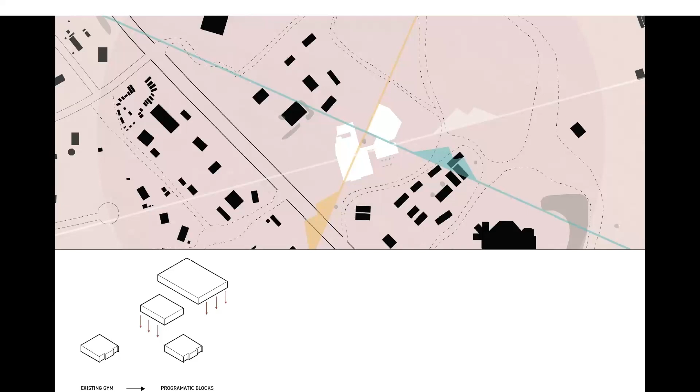Looking at the site and also the form that we want to look at is the existing gym. From the existing gym, we get our programmatic blocks and the areas needed for each of these programs. The Navajo culture seeks guidance from sacred mountains, so in plan we thought to seek guidance from them to work out our axes and where our directional events are happening.

From here, we want to recess, emulate, and imitate the existing form. The current gym has a slanted wall that goes up, and we wanted to look at that form as a precedent for how we got our form.

From here, we look to capture the elements: air, light, and water. When looking at water, water is the strongest element. It can put out fires, wind can't really control it, and it can move earth. Why let us try and control water in our project?

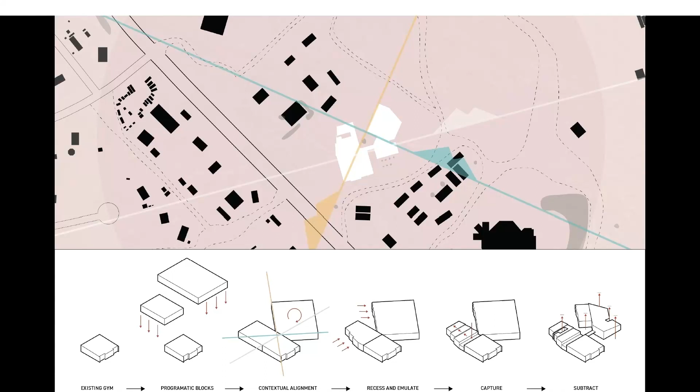Instead, we would like to have that same notion of Tó Naneesdizí as in Tuba City, land of tangled water, having the water journey through our project. When water comes to our project, it flows like a lifeline. It revives the surrounding landscape, but then also immerses the user in a surrounding peaceful bliss garden.

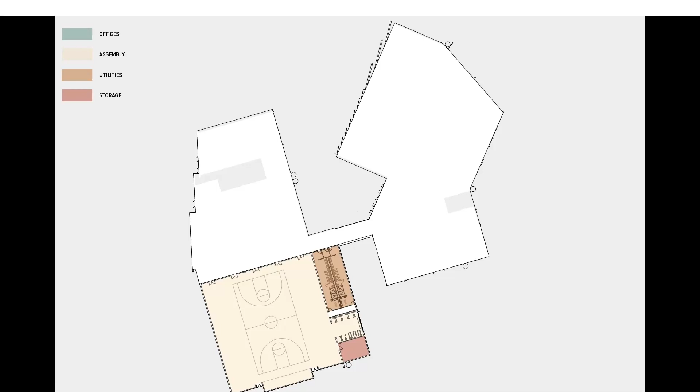Looking at our plan, we look at the existing gym. To the east of that, we have bathrooms, a new gym for workouts, and storage to the south of that. When we flip through this diagram, think about this as a phasing diagram and how this could be built over time.

Going up north, we have the offices that help support the community as well as a multi-use space, which can open up to the courtyard. In this space, we preserve the existing fireplace. This space is also accompanied and emphasized by a commercial kitchen that will help support the different events that happen in this area.

Going to the other side of the project, we have another sturdy foundational point of the project: the chapter house, a place for meetings. Up north, we have the officials' offices, and this can then come down where you can pour straight into the meeting without any interruptions. We also have this accompanied by offices as well as storage spaces.

Going even farther down south, we have more offices. To the north of these offices, you'll notice a little gray patch that comes into the building, as well as on the left side of the building, a gray patch that comes in. These are exterior courtyards that break into the interior of this project, which will be more important as we move on.

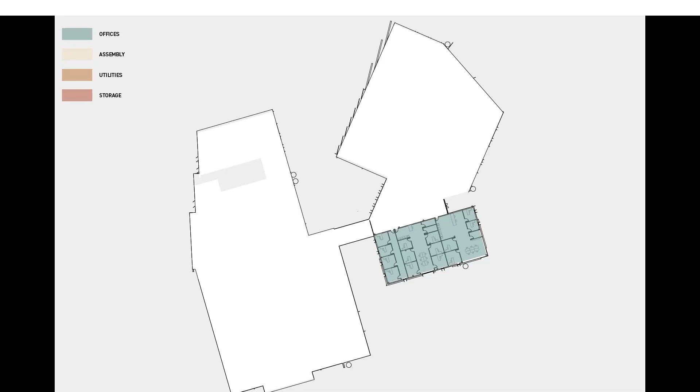Looking at the site, we look at how we can use water throughout this site and how we can vitalize this landscape from north to south. When looking at the north of the project, we have a water collection basin.

With this basin, we thought of having an opportunity for celebration of water, and having this cultural element take shape in the form of an abstract, traditional Navajo wedding basket.

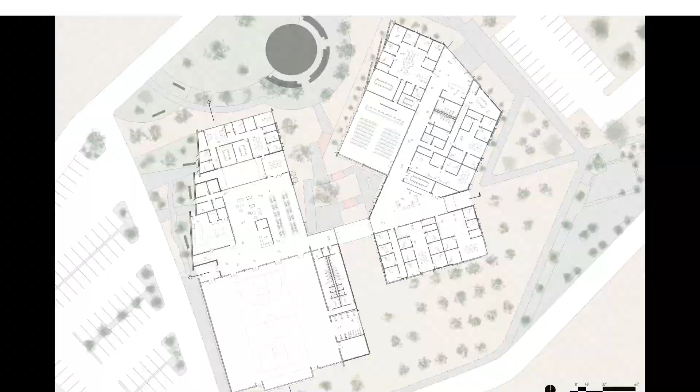And having this opportunity to bring the water through our project to funnel and breathe life into these peach trees down below, which are existing, and having this orchard continue on, as you can see from the left side, really feeling this lush landscape of traditional plants, which are used in different craft making for baskets, rugs, and different cultural activities.

Growing up on the reservation, I was surrounded by these traditional structures, such as chaha'oh. Looking at these structures, we see from the interior you get this forested look that starts to play with light and shadow.

Going back home and paying attention to the land, we started to see what was drawing towards us. How can we then bring this culture and re-implement this back into our project to reflect the community?

Relating this back into the project to reflect the community, we looked at rebar that goes over our windows and creates this same notion of shading through this play with light and shadow, thus bringing this precedent back into the building that we are proposing.

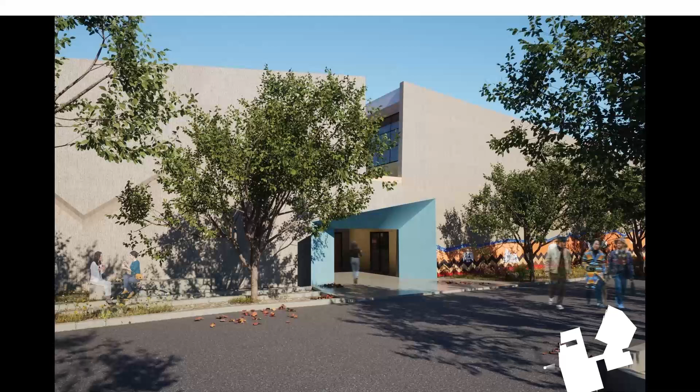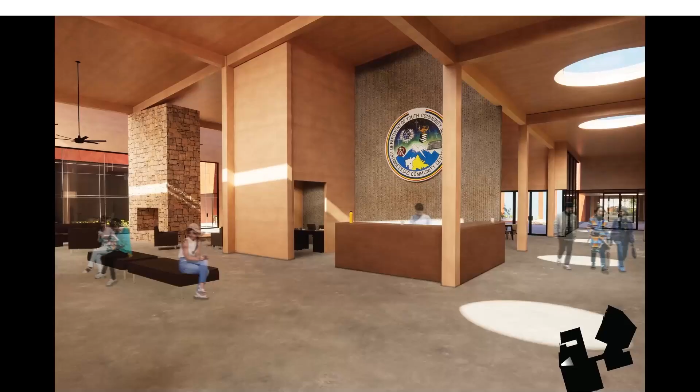Looking at the lobby, we see striated concrete, the same material as the exterior walls we're proposing outside, thus bringing the outside in and the inside out. We also see the community chapter seal, as well as the existing fireplace that we are proposing to revitalize and use. From here, we go to the multi-use space.

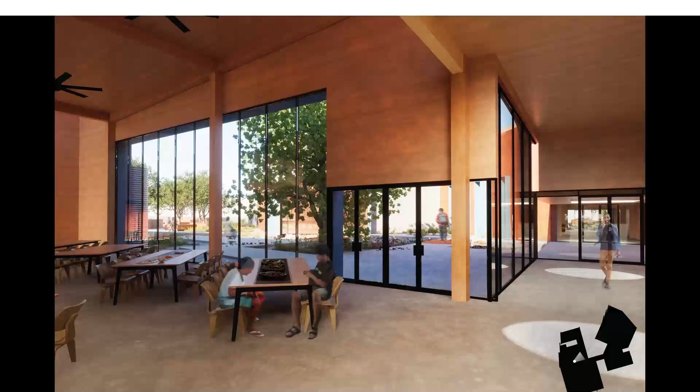This space can be opened up to the outdoors into the courtyard, but it also serves as a vital key in the surrounding community. It hosts different cultural workshops, family events, cultural celebrations, and family celebrations. These events will be supported by the nearby commercial kitchen.

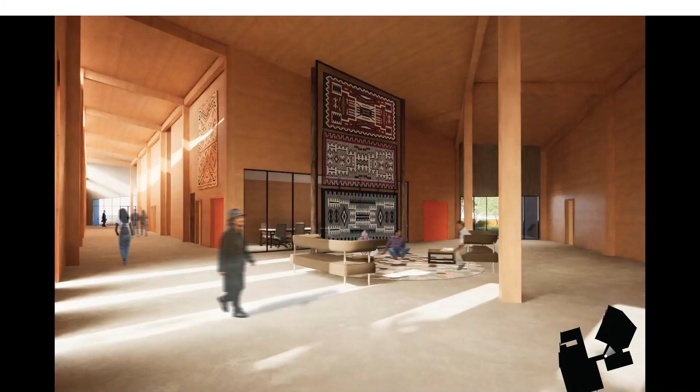From here, we would go through the courtyard and enter the chapter house. To the left, you'll see the grand hall that will eventually take you to the chamber room. To the far right, windows bring in the interior courtyard, reinforcing that notion of oasis in our project. At the center of the screen, you'll see these rugs and this cultural element, which my partner Nate came up with.

When looking at the Civic side, we know this side needs to stand strong and serve as a reflection of the community. How can we reflect that with cultural notions, such as the traditional pattern of storm that is regional to Tuba City, having it serve as a monument to really bring the user into the space?

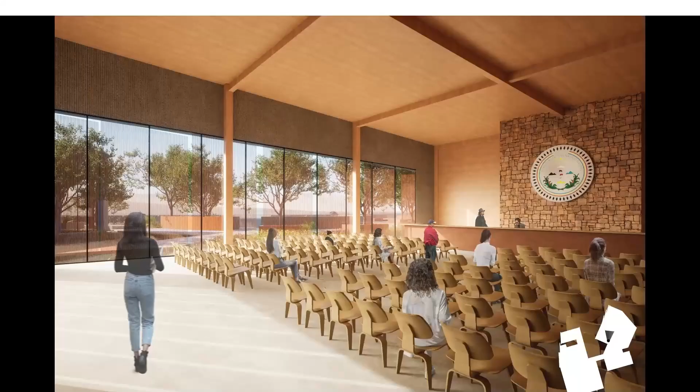When looking at the chapter house meeting room area, we make use of the existing stone masonry. Looking to the left, we have this same brush notion filtering light into the space and providing an ease of movement. From here, we would look at the east-west section.

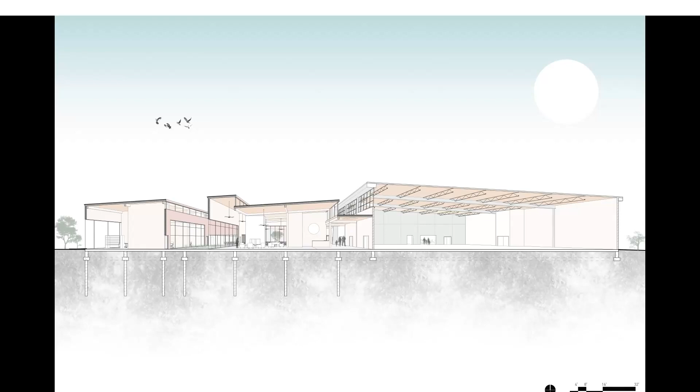At the center of your screen is the lobby we just walked through, the existing gym to the right, and the multi-use space at the center, with the offices on the far left. However, between the multi-use space and the offices, we have an exterior courtyard that collects water and makes greenery in this space, and light that can collect and push into the building, revitalizing this space in the notion of oasis.

When looking at how this oasis revives itself after a rainstorm, we see how this water will trickle through the space and provide a blissful notion of relaxation for the surrounding community, also making use of this gesture shown in the facade of the chapter house, with this brush notion continuing that landscape of oasis into the building.

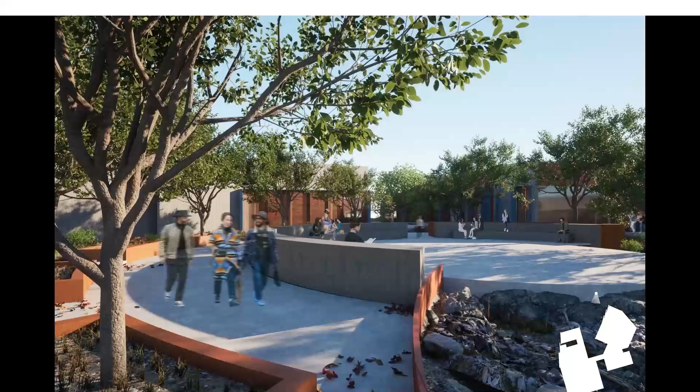This courtyard here is the cultural element you've seen before. This is a main gathering space, but also serves as a place for chapter officials to make announcements, for dances and possible ceremonies, with the space accompanied by the water collection basin to really breathe life into the project.

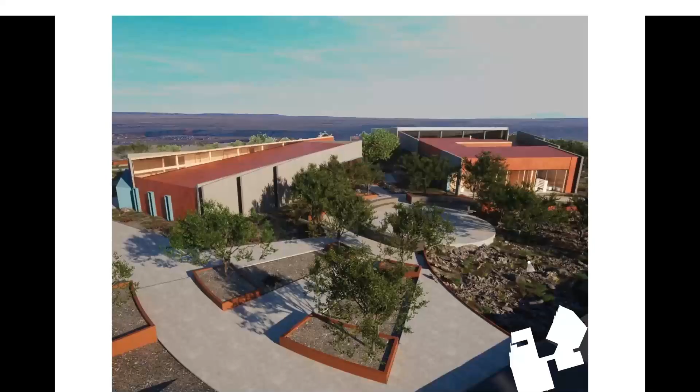Looking at the overview of this project, we've covered a few things: the past, the present, the oasis, and the movement of water in this landscape. What we are proposing is architecture that breathes with this landscape and starts to vitalize into the landscape with water and architecture, thus intermingling with the land of tangled water.